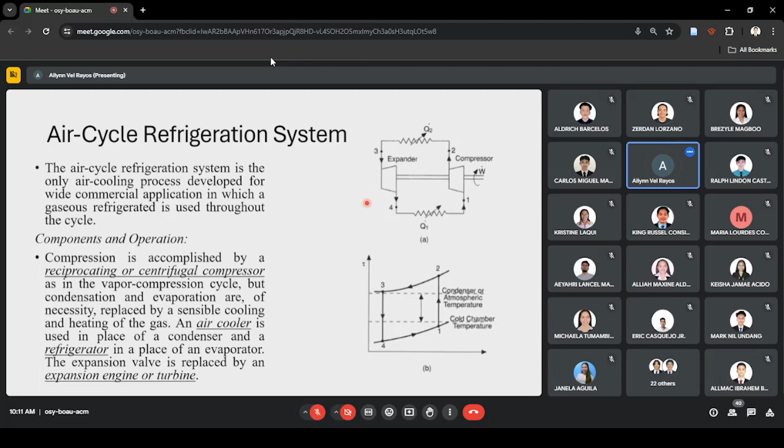Okay? So the air cycle system is ideally suited for use in aircraft because it is light in weight and requires less space than vapor compression cycle. So one disadvantage of the air cycle is that it is not as efficient as the vapor compression cycle. So air cycle refrigeration may be designed and operated either as an open or closed system.

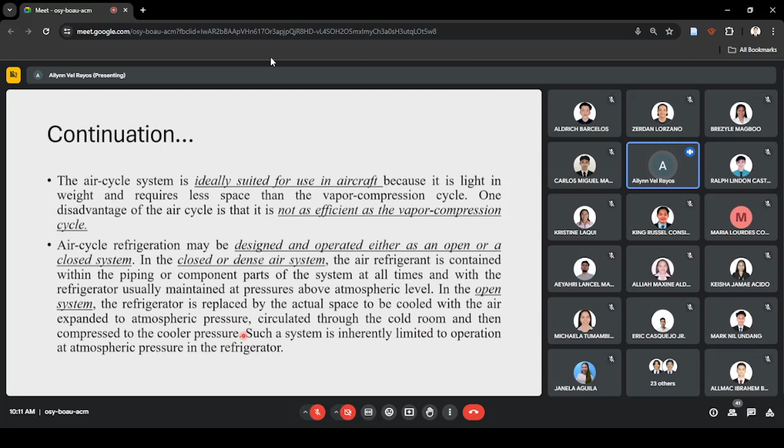So in the closed system or dense air system, the air refrigerant is contained within the piping or component parts of the system at all times, with the refrigerator usually maintained at pressures above atmospheric level. In the open system, the refrigerator is replaced by the actual space to be cooled, with the air expanded to atmospheric pressure, circulated through the cold room, and then compressed to the cooler pressure. Such a system is inherently limited to operation at atmospheric pressure in the refrigerator.

So here are our system processes in the air cycle refrigeration system. Starting from our process 1 to 2, we have isentropic compression dun sa ating compressor. And then process 2 to 3, we have constant pressure rejection of heat. So dito papalamigan yung ating air. So ang gamit natin air cooler na.

So process 3 to 4, we have expansion engine. So sa halip na meron lang tayong work input sa compressor, meron tayong work output sa ating expander. So yung work output dito sa expander is ginagamit para mapatakbo yung compressor. And then yung iba, galing na siya sa kuryente. And then 4 to 1 naman is constant pressure absorption of heat. So this is our refrigerator, yung dating evaporator. So again, for air cycle, meron tayong refrigerator, compressor, air cooler, and expansion engine or expansion turbine.

So for our corresponding TS diagram and PV diagram, our process 1 to 2 is constant entropy, 2 to 3 is constant pressure rejection of heat, 3 to 4 is isentropic expansion, 4 to 1 is constant pressure addition or absorption of heat. So again, this is where our refrigerated load is connected.

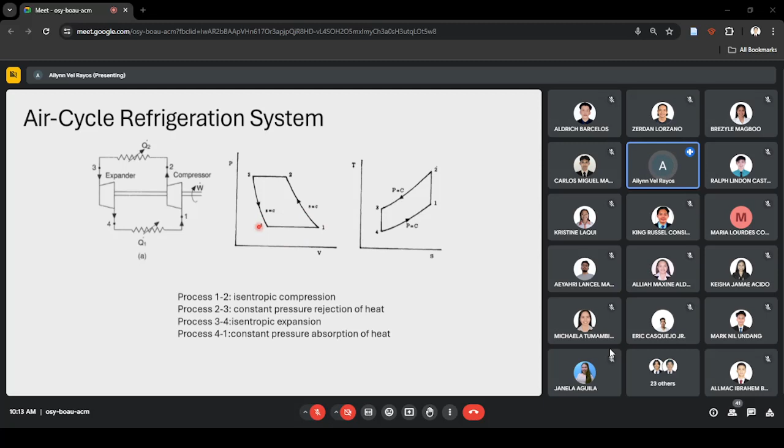So for the corresponding formulas, since we have isentropic processes, you have to review the formulas for isentropic expansion. Starting from our refrigerator, where again our refrigerating effect is computed. Since this is constant pressure, to get Q we'll have to use CP, the specific heat of air at constant pressure. So MCP delta T. Again, constant pressure, getting Q, MCP delta T. For the cooler, since we'll be getting heat rejected, it's also MCP delta T.

For our compressor, our normal formula. So this, K minus 1 or 1 minus K, only the sign convention changes here. For work in the expansion, same formula. Again, 1 minus K or K minus 1 is just sign convention. For network, network is equal to compressor work minus expander work. So you get work at the compressor, then get work at the expander, and then subtract. Then we get the network. For the COP, refrigerating over work. So the work used here is the network. So divide by the network. Is that clear?

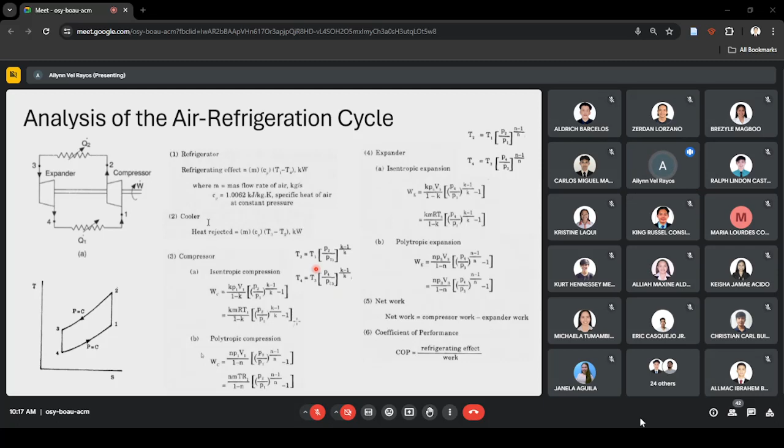Okay. Kindly read this problem. Problem 1. An air refrigeration system operating on a closed cycle is required to produce 50 kilowatt of refrigeration with a cooler pressure of 1,550 kPa and a refrigerator pressure of 448 kPa. Leaving air temperatures are 25 degrees Celsius for cooler and 5 degrees Celsius for refrigerator. Assuming a theoretical cycle with isentropic compression and expansion, no clearance and no losses. Determine A, the mass flow rate, B, the compressor displacement, C, the expander displacement, and D, the COP.

Okay. So these are our givens. We have 1550 kPa, the result of the compression process, and 448 after expansion. So this is working with two pressures. The mic is far. Okay. So we have process 1 to 4, constant pressure at 448, and constant pressure at 1550 kPa for state points 2 and 3. And the other temperatures are given. Leaving air temperatures are 25 degrees for cooler and 5 degrees for refrigerator.

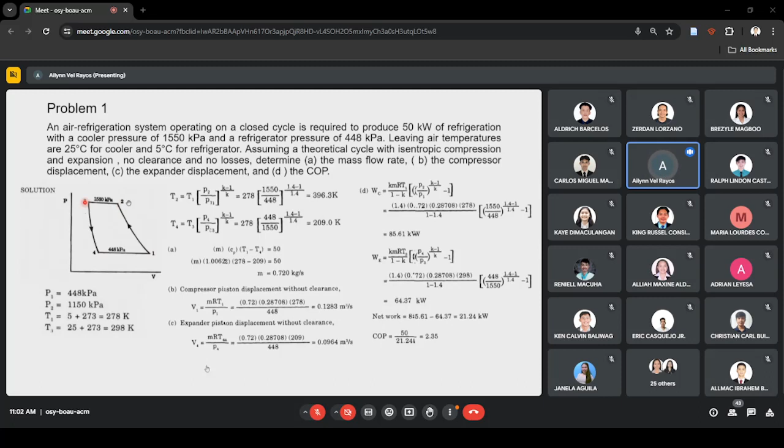Okay. So now let us move on to our problem number 2. So in here, the only difference dito sa previous problem is parang this one is polytropic process. And at the same time, meron tayong mga actual values at inlet and outlet of this. So kindly read this problem, Allmac.

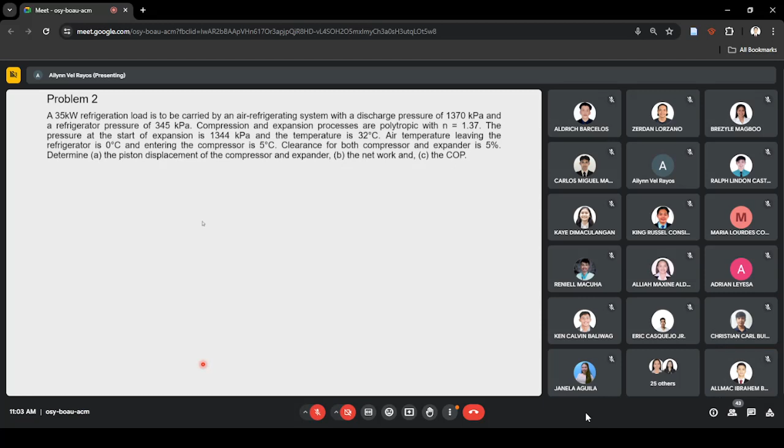Okay. So thank you, Utoy. Okay, so we have given here 35 kilowatt of refrigeration. We have discharge pressure of 1,370 and a refrigerator pressure of 345. So this is polytropic process, yung ating compression and expansion processes. The pressure at the start of expansion is 1344.